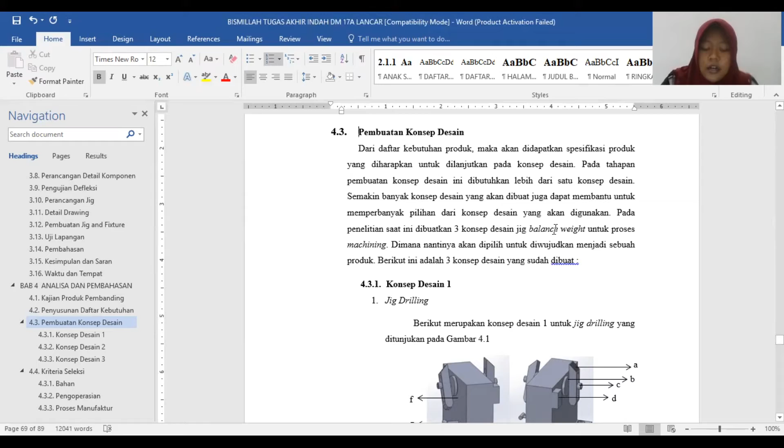In this design concept, there are two jigs used for drilling process and milling process, with three design concepts for each jig. Jig drilling creates a part of the drilling process with a certain angle. Jig milling is used to increase production rate.

Here is a jig picture for each design concept. First design concept: this is jig drilling, and this jig drilling with material. This is jig milling, first design concept, and this jig milling with material.

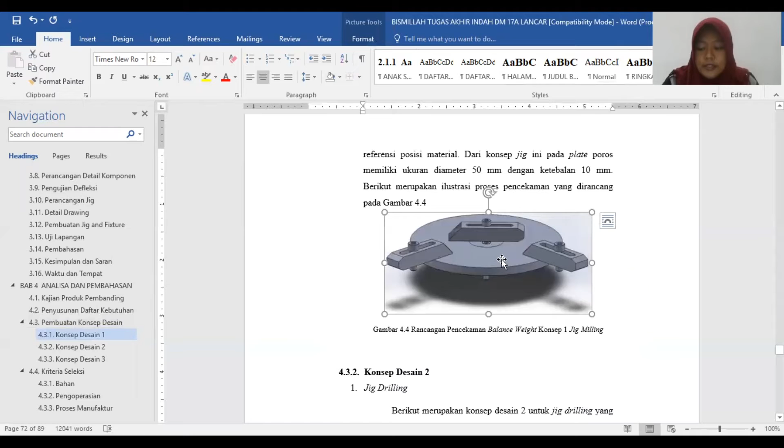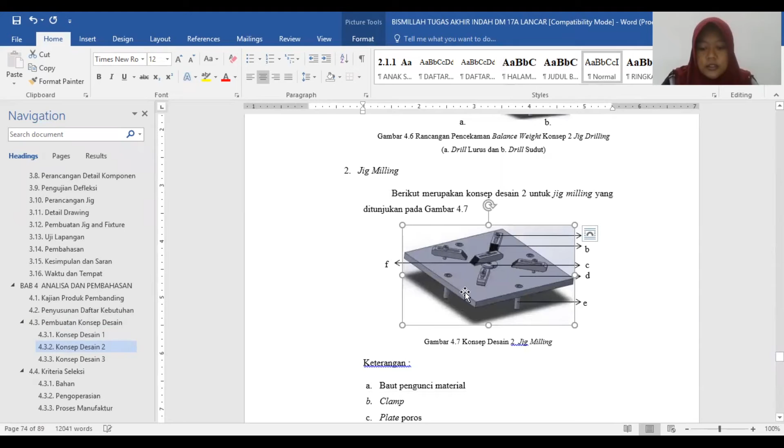The second design concept: this is jig drilling, and this jig drilling with material. This is jig milling, second design concept, and this jig milling with material.

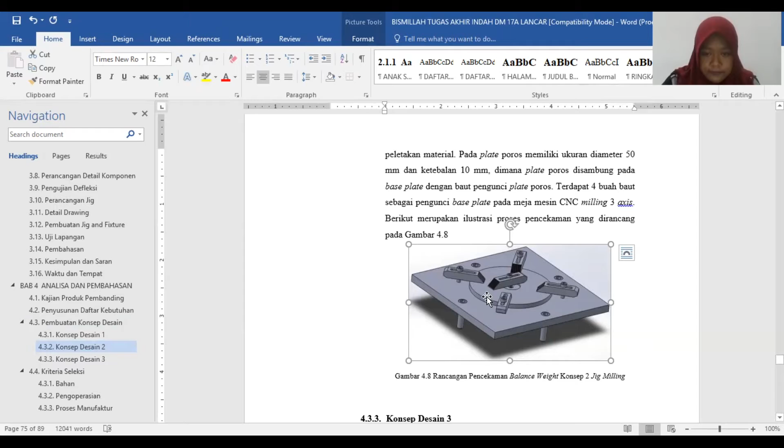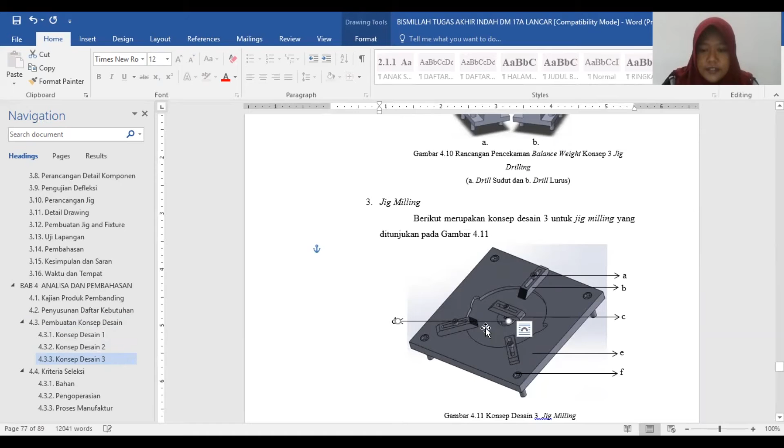The third design concept: this is jig drilling, and this jig drilling with material. This is jig milling, third design concept, and this jig milling with material.

Selection criteria are obtained from several aspects, namely material, operation, manufacture, and repair. From these criteria, each design concept will be outlined, and the best design concept will be selected for follow-up.

Material criteria are included in the list of needs with the selection of material that can facilitate the manufacture of jig and fixture for balance weight.

Operation criteria are included in the list of needs with the aim of facilitating machining in manufacturing the balance weight and not having a long setting process.

Manufacture criteria are included in the list of needs with the aim that the product is easy to fabricate, not long to build, and easy to assemble.

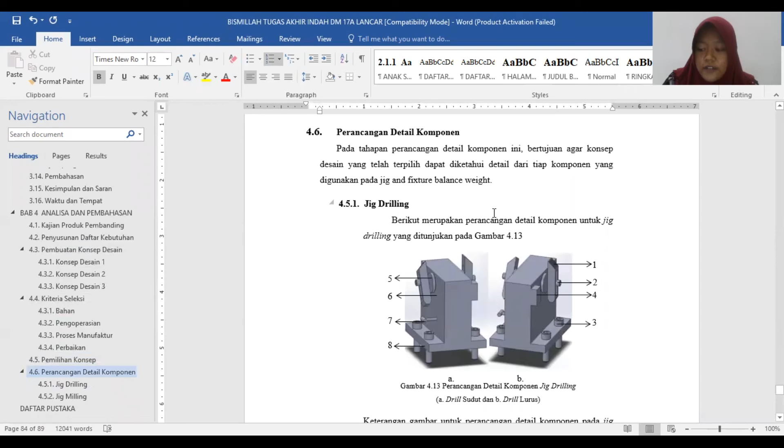Last, concept detail component. This step shows that for the selected design concept, the detail of each component used in the jig and fixture for balance weight can be known.

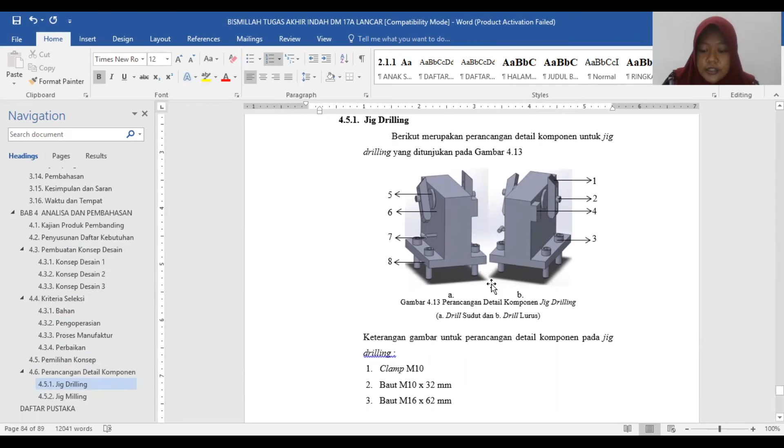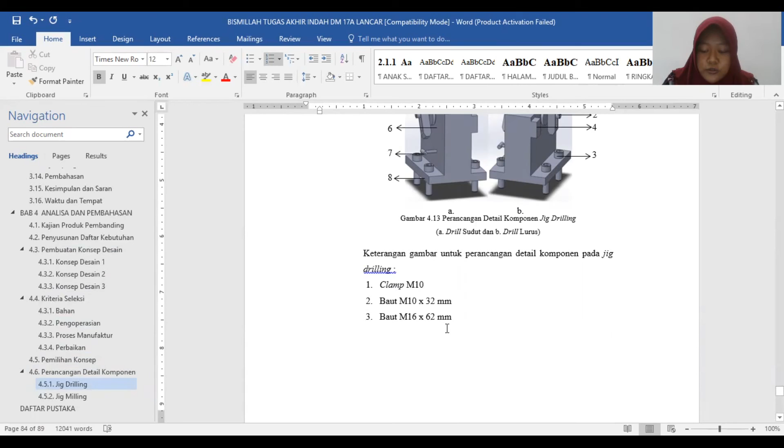Here is a detailed design of components for jig drilling with description of each component: clamp M10, bolt M10 with length 32 millimeters, bolt M16 with length 62 millimeters, stopper with detailed dimension in picture 4.14.

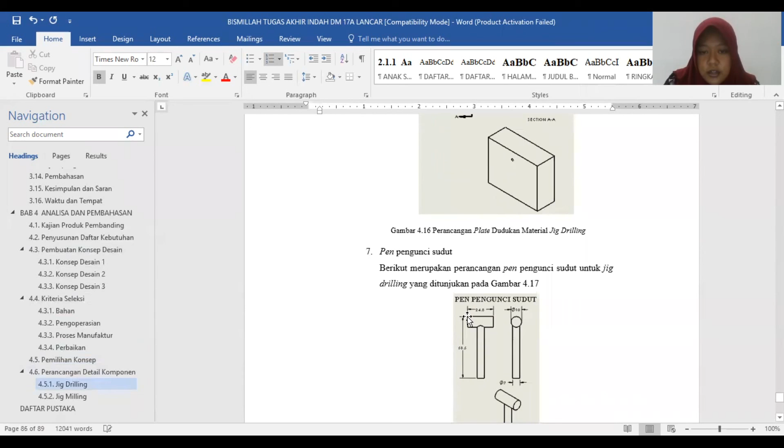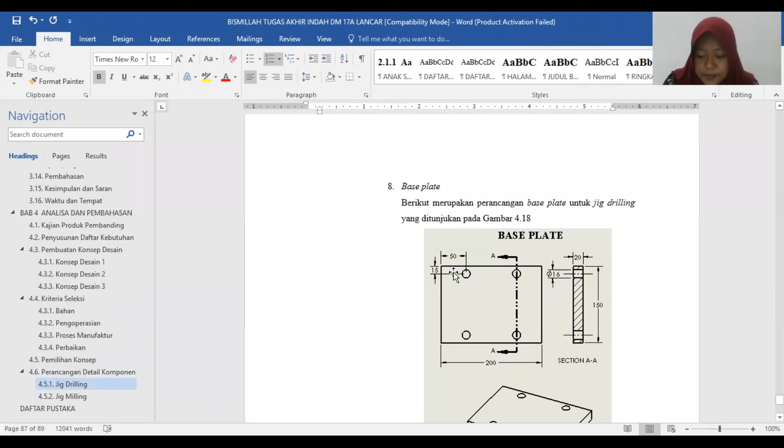Plate as shaft with detailed dimension in this picture, plate as material place with detailed dimension in picture 4.16, pen with detailed component in picture 4.17, and base plate with detailed dimension in this picture.